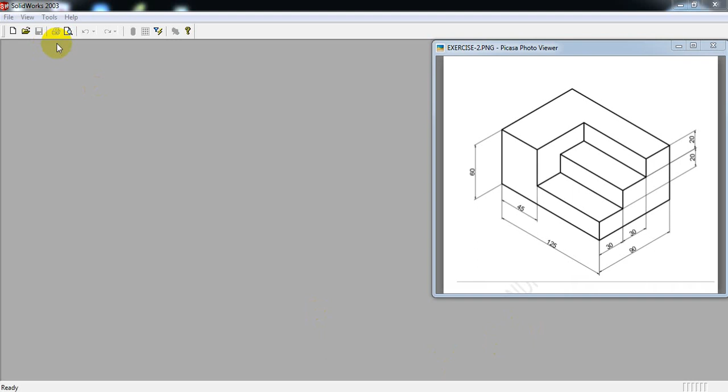Select file, new, select part and select OK.

This is the second exercise. This is the front view, top view, and right side view. In the front view, we can see length and height. Total length of the part is 125 mm, height is 60 mm, and width of this part is 90 mm.

First we have to draw one rectangular sketch. Draw one rectangle and make the dimensions as length 125 and height 60. Select sketch, take the rectangle command, and from the origin point draw one rectangle.

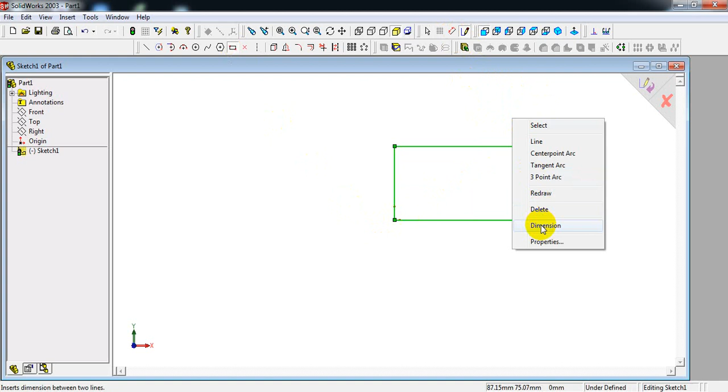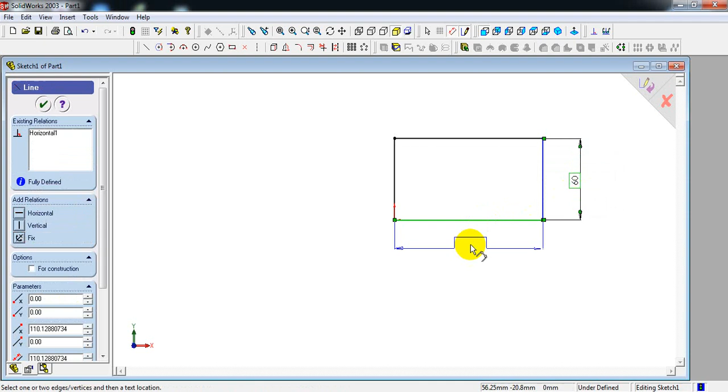From here we can take dimension, or right click to find the dimension command. Length is 125 mm, height is 60 mm. Set the height of the rectangle as 60 mm and the length as 125 mm.

After making the dimension, select isometric view and take the extruded boss base command. Total width is 90 mm, so enter 90 mm and select OK.

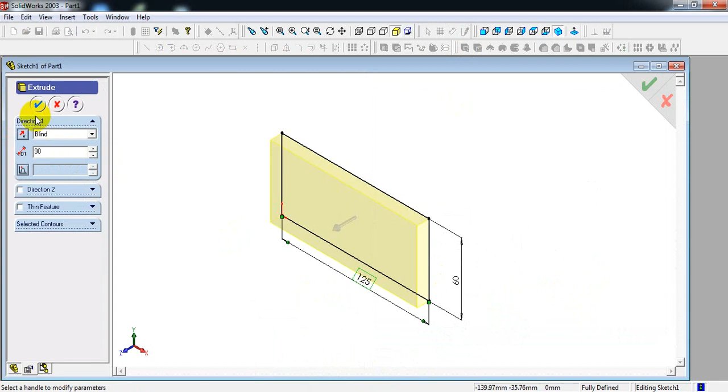In the figure you can see it is cut in the shape of steps. We have to select the right plane or right face, then draw one sketch in this shape: vertical line, horizontal line, vertical, horizontal, vertical, horizontal, and vertical on this right face.

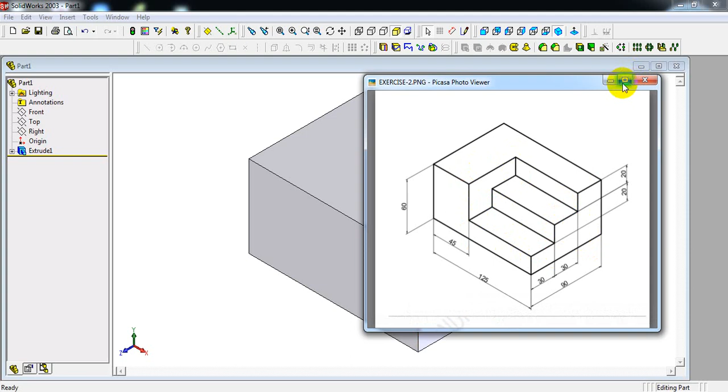Select the right face followed by right view, select sketch, and take the line command. As I mentioned in the previous exercise, wherever you start the line command, the same starting point should be the ending point.

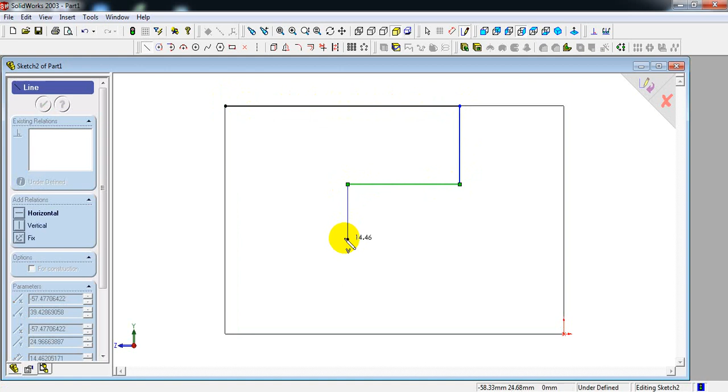From the left corner I am starting this sketch. Draw one horizontal line, vertical line, again horizontal, vertical, horizontal, and then join back to the starting point.

Now make the dimensions. Height is 20 mm, and this height is also 20 mm. Enter 20, then select this other vertical line and make it 20 as well.

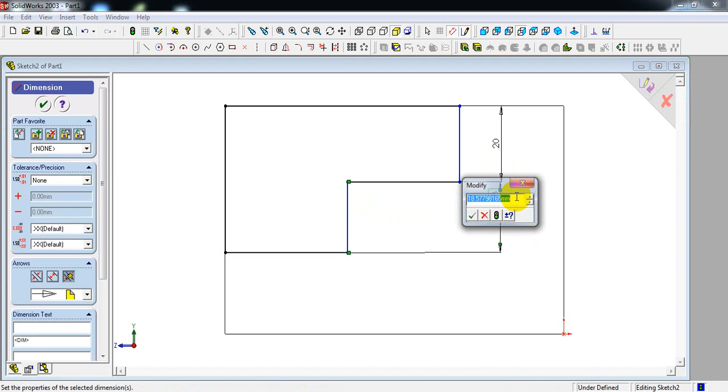Next, this is 30 mm and this is also 30 mm. Select this horizontal line and make the dimension 30, then select the other horizontal line and make it 30 as well.

Now select isometric view. We have to cut this part, this portion here. Now select the extruded cut command.

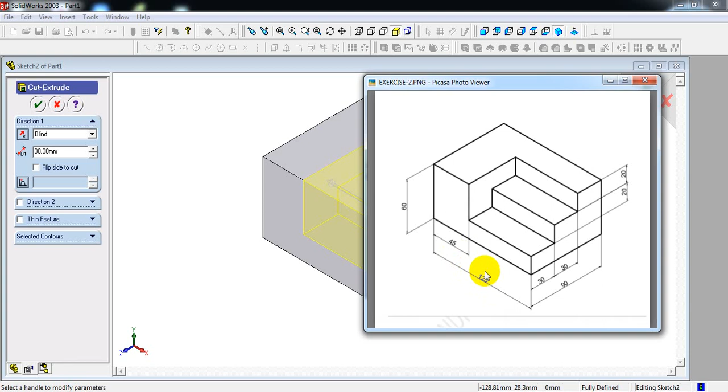How much do we have to cut, meaning what dimension do we give? Total length of the part is 125 mm and the leftover part is 45 mm, so we subtract 45 from 125. 125 minus 45, select OK.

This is the final part. Next, make the dimensions: select dimension, or right click and select dimension.

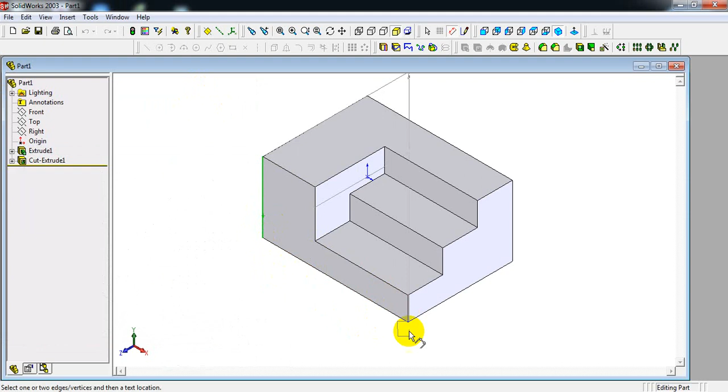Do the dimensions as per the manual. First, total length from left edge to right edge is 125, from top edge to bottom edge it is 60, and from left to right edge it is 90. Next, this is 30 and this is also 30 mm. This is 20 and this is also 20. These are the dimensions.

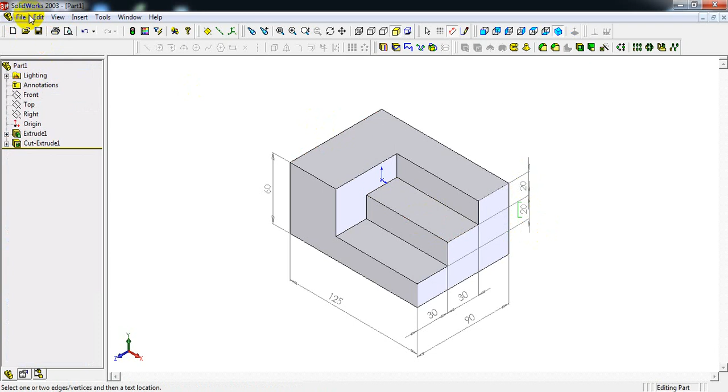Next, go to file, save, name it exercise 2, and select save.

Next, select new, select drawing. The sheet format dialog box will display; select no sheet format. We have to give the paper size, depending on what size paper we are going to use for the printout or drawing. Select A4 landscape, and select OK.

This is the drawing toolbar. In the drawing toolbar we use predefined view and standard 3 view. Select predefined view, place it on the bottom right corner, select isometric, and insert model. In insert model, browse to exercise 2, which I have saved as M-CAD exercise 2, select open and select OK.

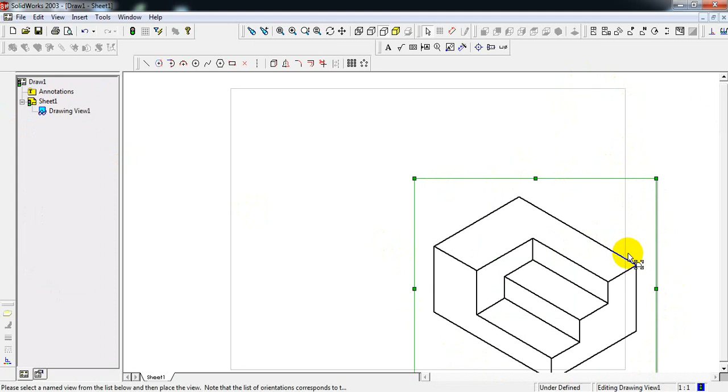Select OK. This must be inside the margin, but it is outside. Click and drag the object, or select it and choose custom scale. Here we can reduce the size of the scale; it is 1:1, so we give it as 1:1.2. Now the size of the object is reduced.

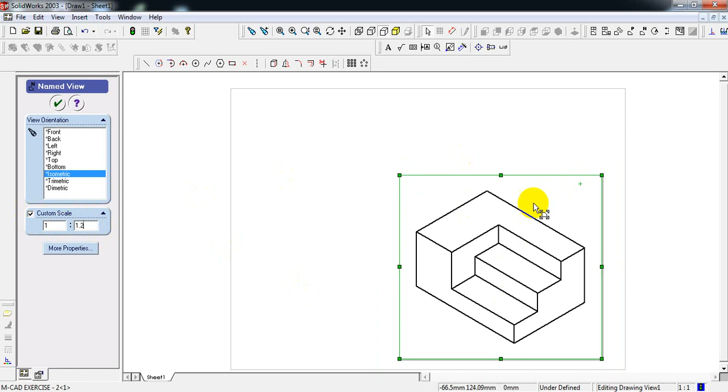Next, go for standard 3 views. Click within this box, as I have selected here, and select OK. So this is the side view, front view, and top view of this object.

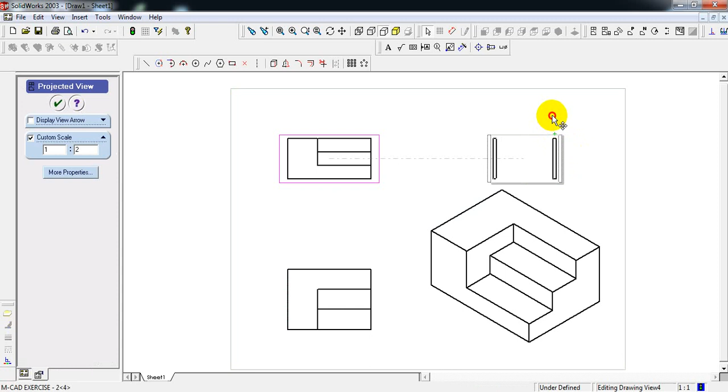Now go to insert model items and select OK. These are the dimensions displayed here. Now, whichever are not necessary you can delete and place them properly. In our drawing it is not mentioned as 80, so it is mentioned as 45; from here to here it is 45, so make it 45.

Next, go for note, click here, enter the text: this is front view. This is top view. This is side view. And this is isometric view.

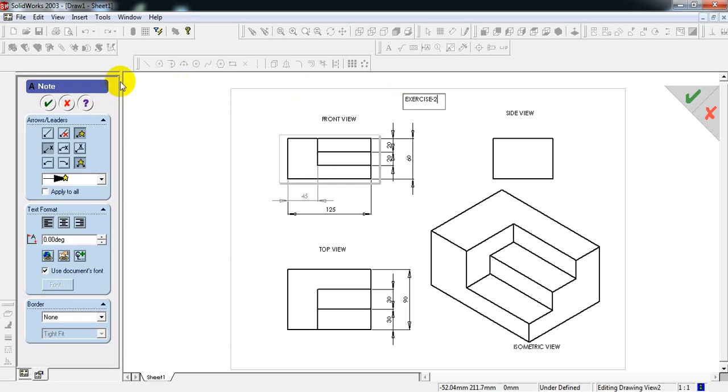Now select OK. So this completes your second exercise.